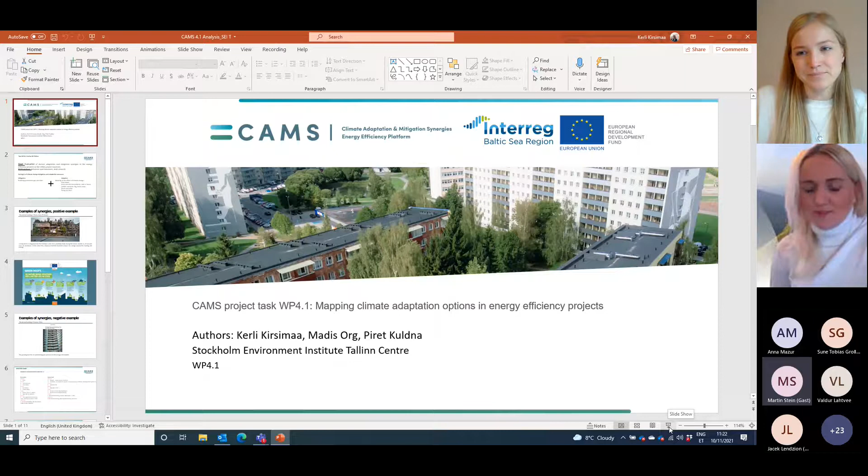So thank you for the other participants so far. It was very interesting to actually hear all these practical examples, the good things that are going on in Denmark, and also regarding the funding sources from Poland, from Anna. But now we are actually taking a step a little bit back, and I will talk more about the theoretical aspect and perhaps why such energy efficiency improvements are actually needed.

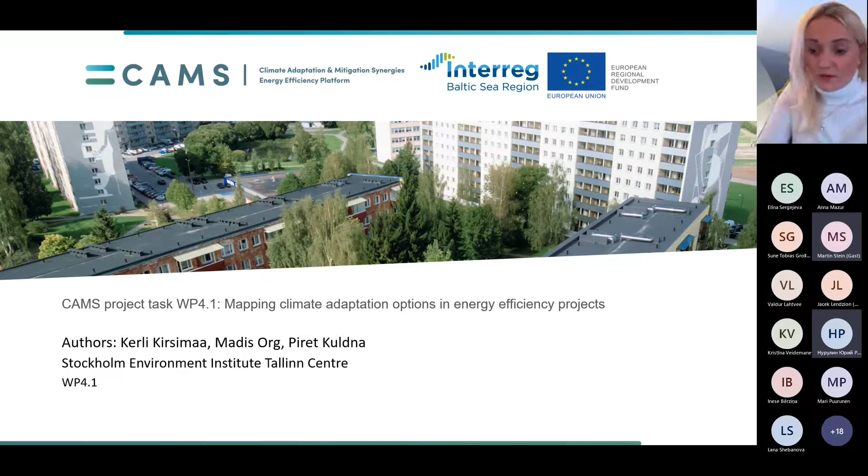So my name is Kerli, and I'm working for Stockholm Environment Institute Tallinn Center. I will give a presentation regarding a research that was carried out under the CAMS project back in spring 2019. Together with me, I also had my colleagues Madis Org and Piret Kuldna, who helped me to carry out this particular research. So what was the goal of this research?

So basically, we evaluated different energy efficiency projects to see to what extent they have implemented climate adaptation and mitigation measures. And also we looked at different synergies between these measures. The methodology was that we developed quite an extensive questionnaire that was distributed among the different developers and project leaders of these energy efficiency projects. And we also carried out an extensive desk research.

But it needs to be explained what we actually mean by synergies. The synergies of climate change mitigation and adaptation measures are basically the type of climate measures that help to reduce greenhouse gas emissions, while at the same time helping to adapt to the already changing climate conditions.

So we already know that climate is changing, and the most important aspects of these are the heat waves that we are experiencing already in the summers that are increasing, also more extreme weather events such as heavy rainfall, rainstorm, fog, heavy snow, also increasing storm and wind that we can already see today, and obviously rising sea level. So these are some of the main aspects we need to take into account while adapting to the changing climate.

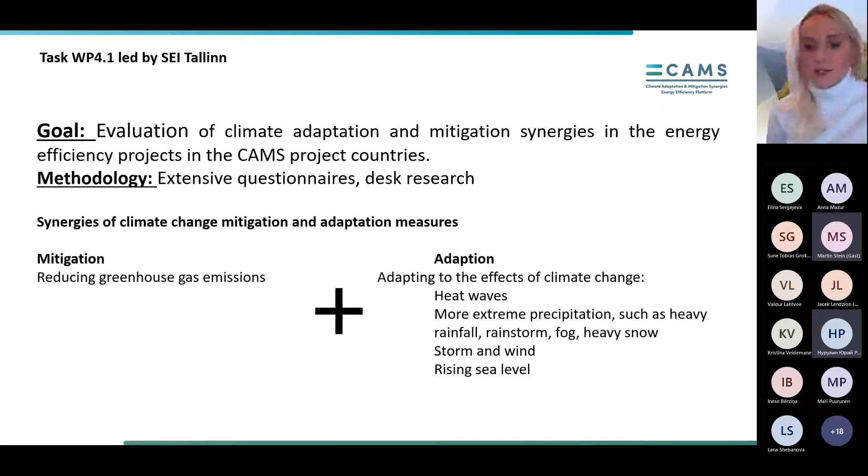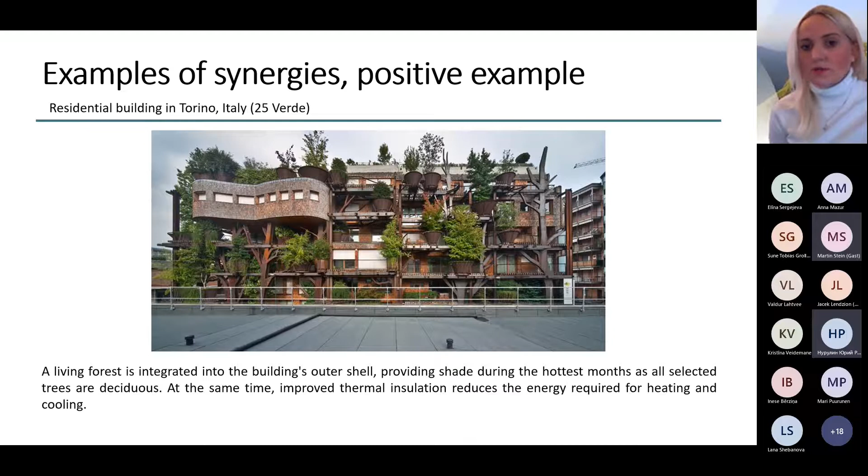However, the synergies can also be negative. So the implications between adaptation and mitigation are not always positive. But just to understand better what we mean by synergies, here is an example of a positive synergy in Italy. This is a residential building from Torino. You can see that here a living forest has been integrated into the building's outer shell. This can help to cool down the building during hot summer months, but at the same time, there is a positive impact also on mitigation, because it can also help to improve the thermal insulation and reduce the energy consumption of the building as such.

Another positive example of synergies is green roofs, because knowing that in the future we're going to have heavier rainfalls, green roofs can help us with water management a little bit better, because they can absorb the rainfall and as such restore the natural water cycle. Also, they can reduce the effects of severe storms, because green roofs can act as protection from hail or as punch absorbers.

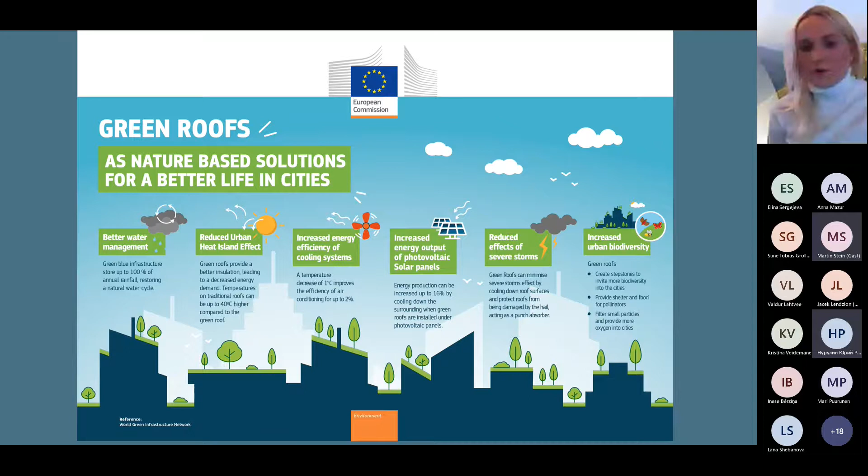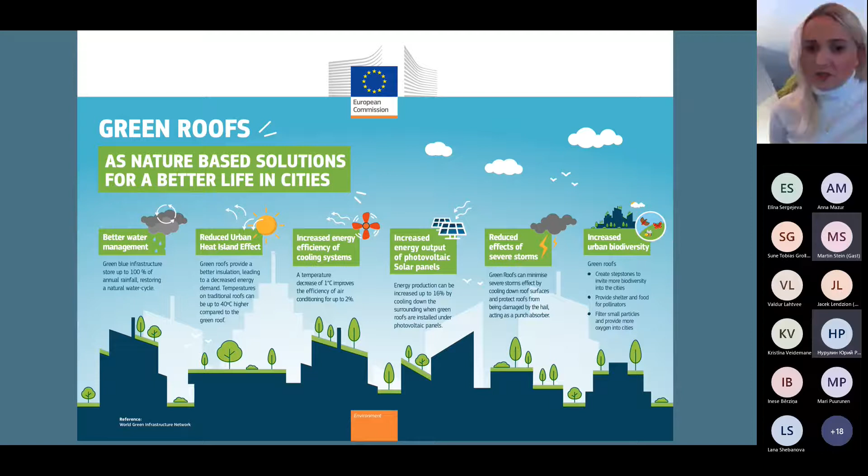But there are also positive effects for mitigation, because green roofs can also help to increase energy efficiency through increased cooling. Also, there's a positive effect on urban heat island effects and biodiversity, and also increased energy output of photovoltaic solar panels.

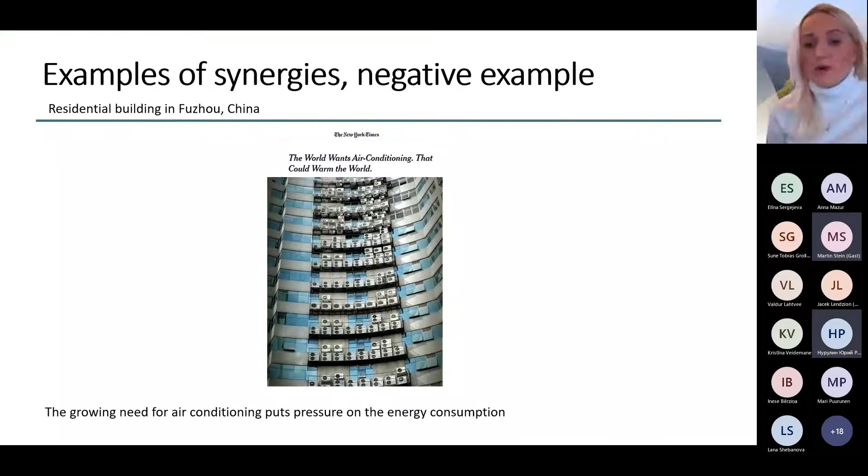So here is an example of perhaps the most commonly known negative aspect of synergies between climate adaptation and mitigation measures. Here you can see a residential building from China. As we know, there is a growing need for cooling in the future due to the increasing heat waves in the summer. But this also means that there's a negative impact on mitigation, because more energy is consumed, and as such, there will be more greenhouse gases. This is not only going on in China, but also elsewhere in the world, also closer to us.

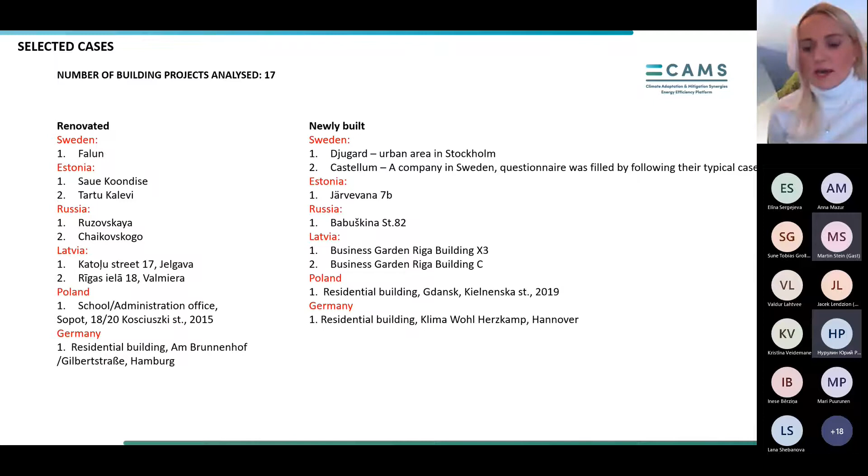What do we actually mean, going back now to our particular research, by the energy efficiency projects that we evaluated? So basically we selected 17 different building projects among our project partner countries: Sweden, Estonia, Russia, Latvia, Poland, and Germany. The aim was to select at least one renovated building project and at least one newly built building project from these countries that have applied energy efficiency measures.

So a little bit more about the background and the methodology of this research. Before going to do expert interviews or to question the project leaders of these projects, our project team here in SEI Tallinn mapped down 50 climate adaptation and mitigation measures in total. These measures we divided into two main groups related to various aspects of the buildings. In the first group, we mapped down climate adaptation and mitigation measures that were linked to energy and building envelope. In this group, we had 24 climate adaptation and mitigation measures.

And then we mapped down what are the aspects of synergies between these measures. So you could have adaptation measures that have certain implications on mitigation and vice versa, mitigation measures that have certain implications on adaptation. And then there's a certain group of adaptation and mitigation measures left that don't have any aspects that link with each other. In this first group of measures, we had 13 measures that actually have certain synergies between each other.

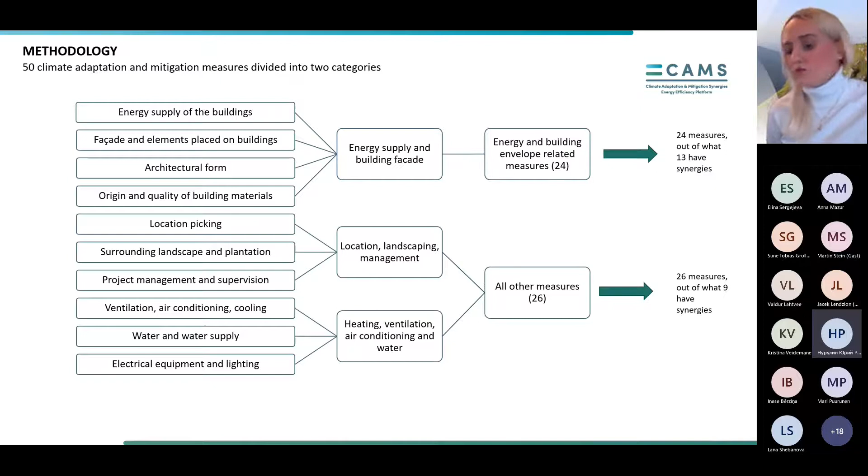The second group of measures were linked to the other aspects of buildings, such as location picking, surrounding landscape, general project management and supervision, also ventilation, air conditioning, cooling, water and water supply, electrical equipment and lighting. In this group, we mapped 26 different climate adaptation and mitigation measures. And out of these, only 9 actually had linking aspects between each other, the so-called synergical measures.

So going into the results of this research, on this slide we can see the results from the first group of measures, the energy and building envelope related ones. You can see 2 different graphs. One is representing the results from newly built buildings, and the second one the results from the retrofit projects. In the middle of those 2 graphs, you can see the type of adaptation and mitigation measures that actually have synergies between each other. And then, as I explained previously, there are adaptation measures that didn't have any implications on mitigation, or mitigation measures that didn't have any impacts on adaptation.

So basically, the dark green color represents the number of building projects that applied certain measures above the minimum standards. The light green represents the number of building projects that applied certain measures only to the minimum standards. And the overall length of these columns shows the total number of all the building projects that applied certain measures.

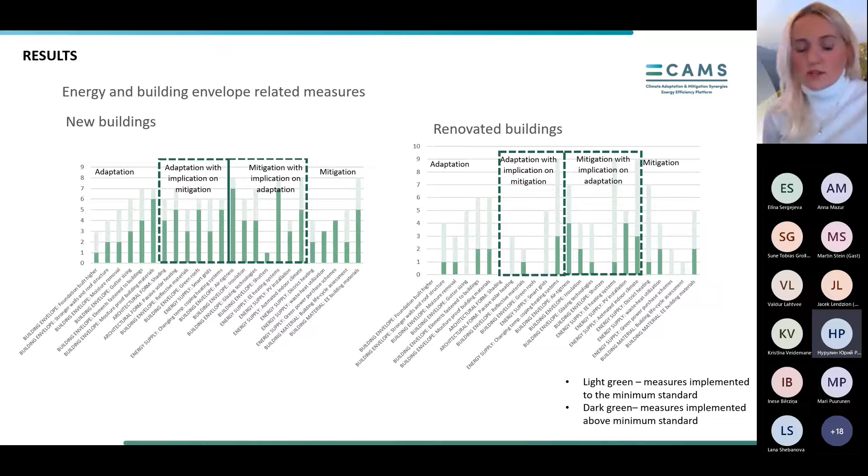What we can see is that in the new buildings, adaptation has been taken more seriously compared to the renovated buildings. We can also see that a number of measures were applied more above the minimum standard compared to the retrofit projects. Regarding the synergies, in retrofit projects there were more mitigation measures that have impacts on adaptation, and these were measures related to energy efficiency improvements, such as better air tightness, energy efficient heating systems, and automated indoor climate.

While for newly built projects, we can see more adaptation measures that also had impacts on mitigation, and more measures that were innovative, such as green roofs, passive solar heating, shading, things that were not so popular to apply on retrofitted building projects.

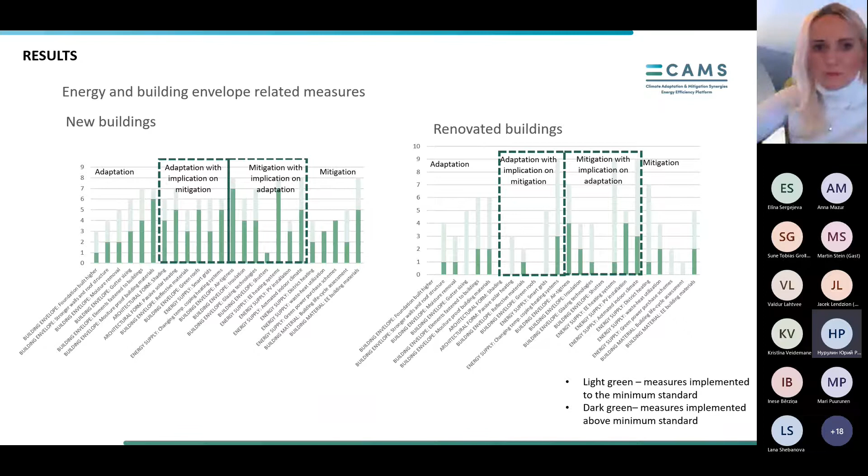Now moving on to the next category of measures, which was measures linked to certain other aspects of buildings, such as landscaping, location picking, water supply, general project management, and so on. And here actually the picture is quite similar to the previous slides, because we can also see that a lot more measures under the new buildings were implemented above the minimum standards. And we can also see that, again, adaptation has been taken more seriously, even though adaptation is not entirely left out from retrofit projects.

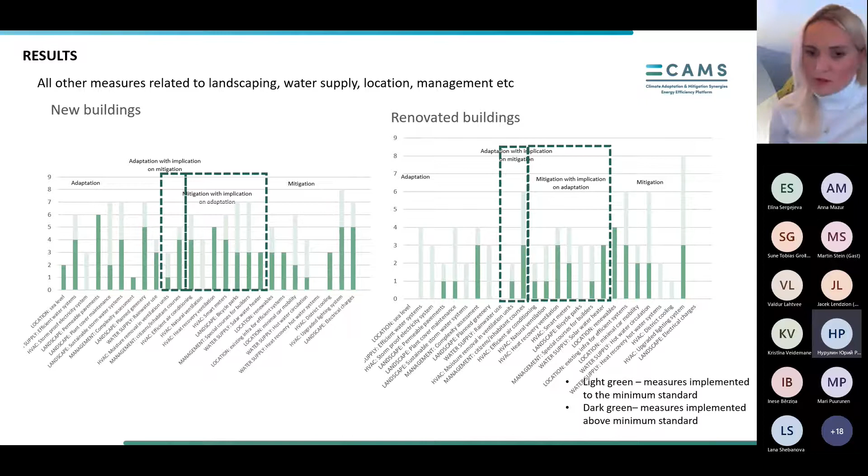And regarding the synergies between these climate adaptation and mitigation measures, there were more mitigation measures that have impacts on adaptation than vice versa. And the most popular measures in this category in both renovated and new buildings were measures such as heat recovery, ventilation, and smart meters. And in the case of new buildings, again, there were other more innovative things that were considered as well, such as special courses for builders or the people that maintain the building. Also, bicycle parking lots were built more often. Stormwater systems were more innovative, and so on.

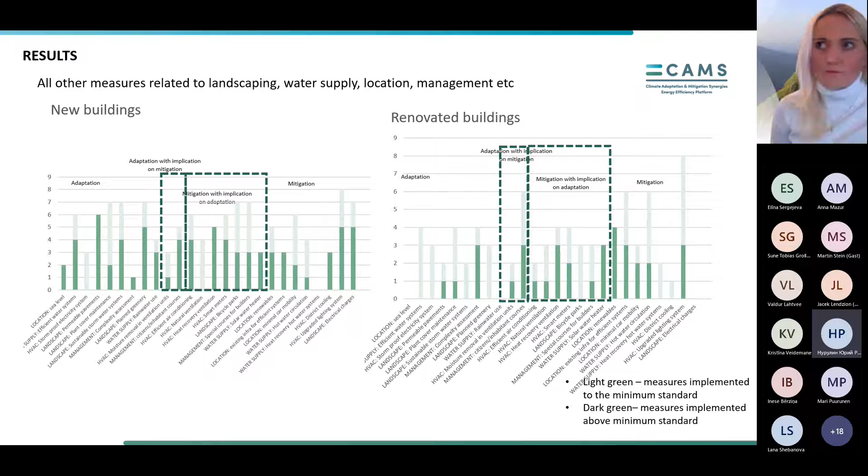So just quickly jumping to some of the main conclusions: while questioning all the project leaders and the developers, we could see that mitigation and adaptation are rather delivered quite separately and not in synergy. Also, adaptation, if implemented, is rather done in an ad hoc manner, because it's more a decision of the developer, and it depends on their willingness and knowledge. For instance, I remember when I conducted an expert interview with one of the developers of a newly built building project here in Estonia, it was actually intentional for them from the beginning of the project to implement certain more innovative actions or measures.

However, as I said before, it's not that adaptation is entirely forgotten in retrofit projects. Some of the most popular adaptation measures that we saw were the maintenance of plant cover and removal of dangerous trees near the buildings, which is very helpful in terms of future extreme weather events and increasing storms. Also, permeable roads and car parks that help to reduce water and flooding issues. And also the stronger attachment of elements fastened to buildings that can cope with increasing storms. But it could also be that these measures are implemented more in a business as usual manner and not really intentionally taken as adaptation measures per se.

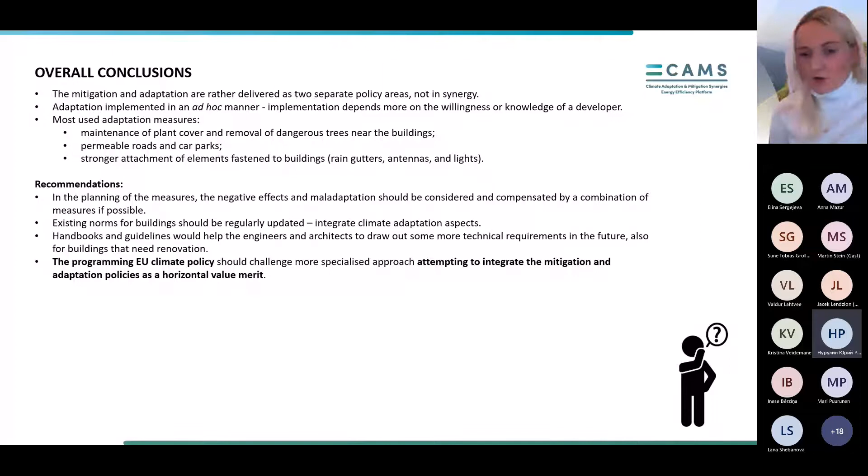Also very important would be to update existing norms for buildings and, if possible, integrate them more with climate adaptation aspects. Handbooks and guidelines are obviously also very useful, especially for engineers and architects to have more technical requirements in the future, and also for buildings that need renovation. I already know some very good, strong handbooks from Sweden and England, for instance. And another very important recommendation is that the programming of EU climate policy should challenge the specialized approach, attempting to integrate the mitigation and adaptation policies more horizontally. And as Valdur said when he started this meeting today, this is already something that is going to be improved in the near future. But that's it from my side.